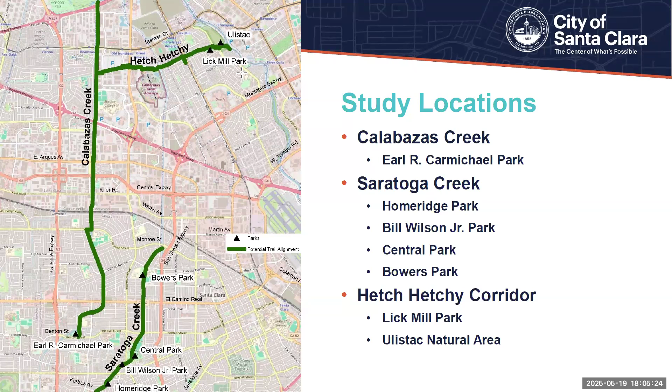If these trails were to develop, similar to the San Tomas Aquino Creek Trail, you would have a variety of off-street routes throughout the city connecting to many important visitor centers, to businesses and colleges, as well as to other local trails that are built, including the Guadalupe River Trail and the San Francisco Bay Trail.

This study builds upon work that the city undertook about 10 years ago, which was to first study the feasibility of these corridors. This work builds on that, and it expands to try and look at actual design, conceptual design of how a trail would be routed along these lands.

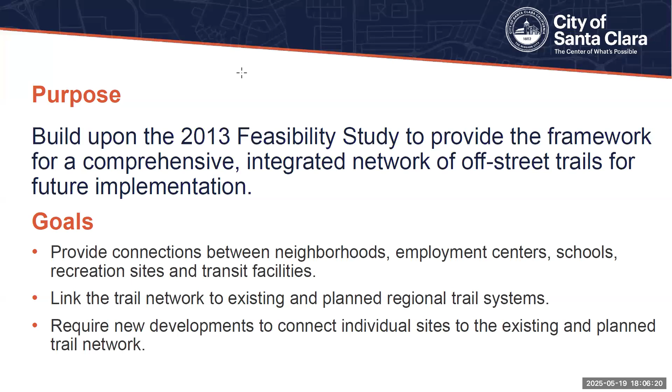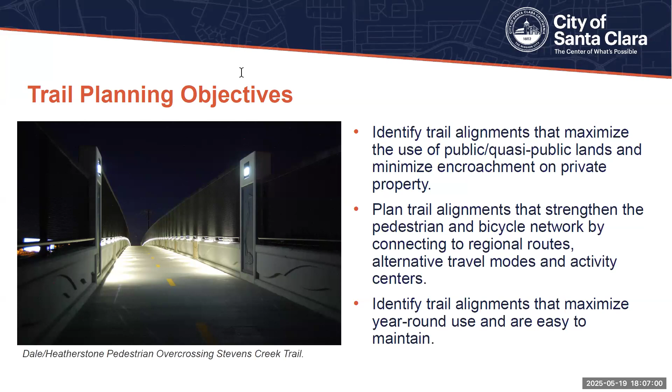It also does a lot to outreach to stakeholders who may own or control the land. Not much of the land that we're talking about is owned by the city of Santa Clara. Much of it is owned by San Francisco Public Utilities, by Valley Water, by other jurisdictions, even some private owners, Caltrain, Union Pacific Railroad that conveys the Capitol Corridor line as it comes into the Stars and Stripes area. So it's really a process of working with your partners to be able to facilitate development, again, not unlike the San Tomas Aquino Creek Trail that the city successfully built a number of years ago.

We want the trail system to honor the creeks. We want the trail system to link with the on-street system so it expands and builds upon that. And we really want to engage the community in thinking about what's possible. These are the different studies that have been undertaken or are in process. We are at the beginning of the public outreach phase.

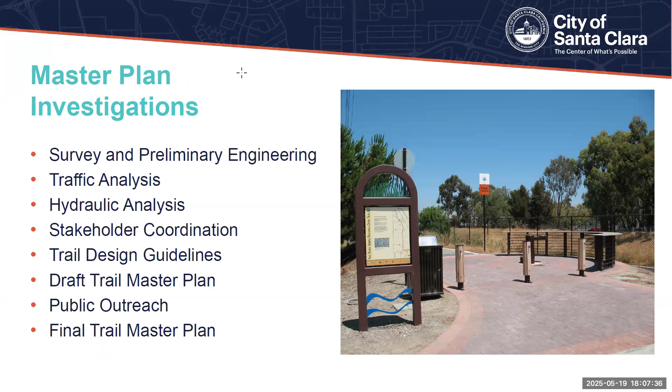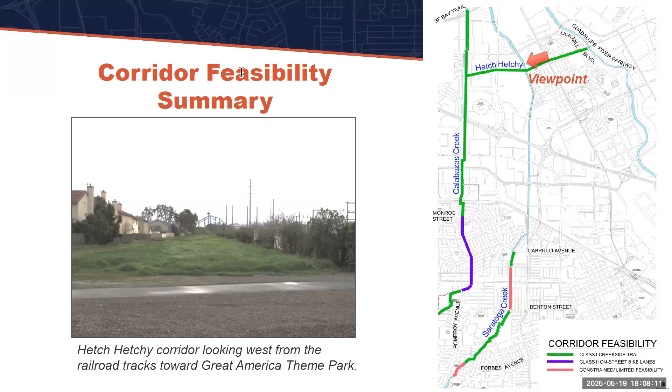This is just a very general map of the corridor feasibility as figured out in 2013. Anything you see in green has the potential to have a trail. Anything in purple really requires an on-street alignment, a bypass. And anything in pink means there's really no opportunity anywhere in the corridor or on the roads to create a trail. Very limited land, and I'll talk a little bit about that with each corridor.

One of the first things we do when developing trails is look at how much land is available, who owns it, who has easements on it, and what kind of habitat conditions exist. Nowadays we're also looking at climate change and how that will impact portions of the trail all around the bay.

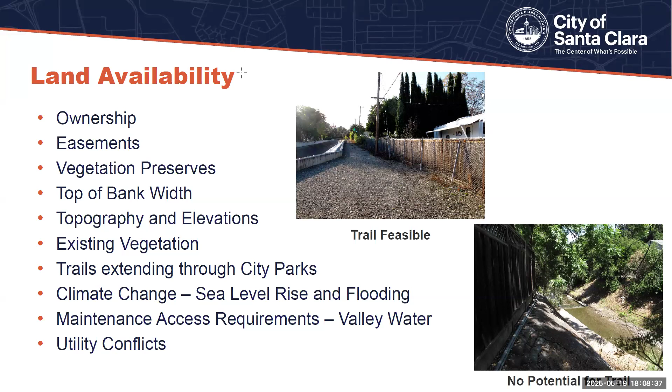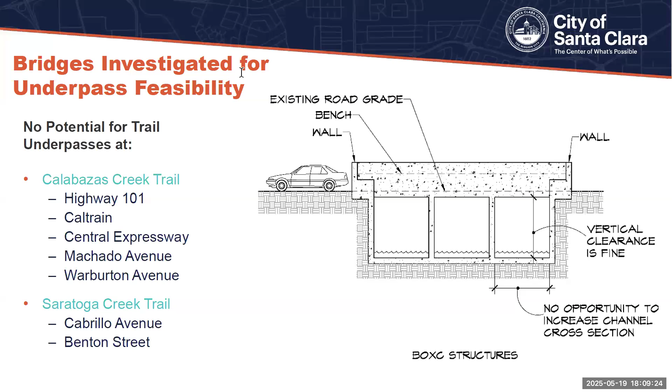We looked at bridges on the two creeks where we have bridges spanning the waterways. When we had bridges with no ability to open up, oftentimes those areas were inaccessible for creating an underpass under the trail. As you can see from this slide, that's a box culvert - there's no ability to lay back walls to create an underpass. The streets listed were not possible for a trail underpass, meaning either you're doing a tunnel adjacent to the creek or a pedestrian overpass to create a grade separated system.

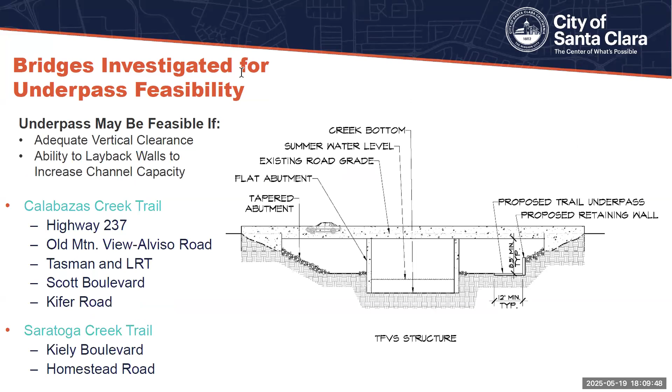Here is an opportunity where you can lay back the creek bank underneath the bridge. As long as you've got enough vertical clearance to meet Caltrans bike clearances, you potentially can build a successful trail underpass. Those are some of the sites where you potentially can build, as long as you can continue to also pass flood flows.

Trail construction takes time. As you know, in Santa Clara it took a decade or more, maybe even close to 15 years, to build the San Tomas Aquino Creek Trail. It was built in reaches or phases, and those phases had logical ending and beginning points that would connect into the on-street system, but it takes some time. It takes time because you're working with partners, permitting agencies, resource agencies, and having to raise the funds to do it.

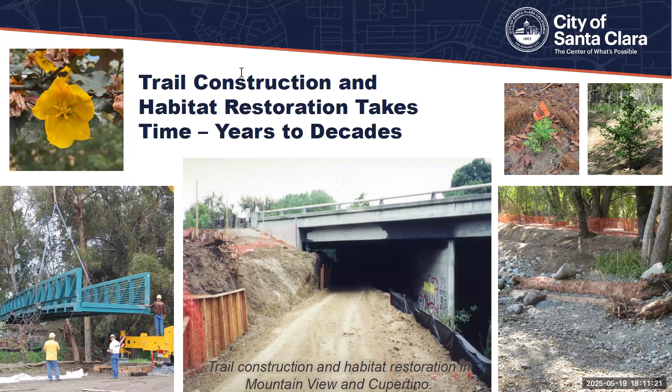So now I'm going to take you through each one of the corridors and just give you a sense of what's out there and what the preliminary concepts are for each.

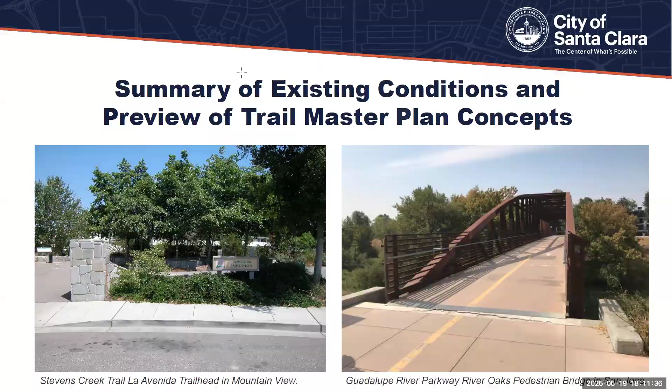Let's start with Calabazas. Calabazas begins upstream around Prune Ridge and extends all the way down to the Bay Trail underneath Highway 237. On this map, areas in red indicate we didn't have enough land availability for a pathway, and if you see a bright red dot, those were some of the underpasses I mentioned earlier where we couldn't put a trail underpass beneath that bridge.

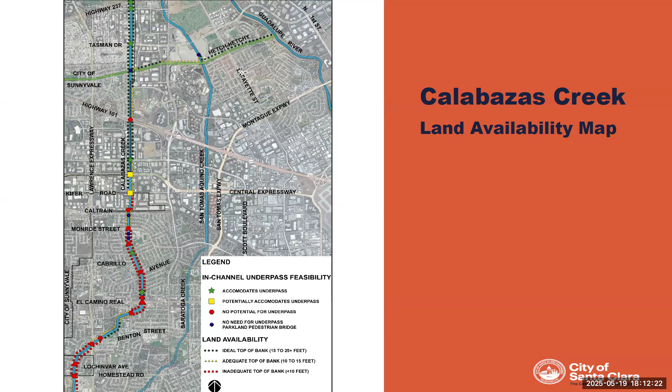You can see, in general, a lot more of the blues and greens from El Camino down to the bay, and quite a bit of red as we're moving more inland. Part of that is associated with the city's historic land use development, where much of the areas south of 101 were residential, and things were built very close to the creek. Things built later gave more space to the creek and levee setbacks. So it's a lot to do with how we built as a society over the past 50 years.

Calabazas Creek has 5 potential underpasses. One of those was recently built through a joint project between the city of Sunnyvale and Santa Clara, at Old Mountain View Alviso Road - you can see the construction photos there. That was set to allow bicycle and pedestrian passage underneath the bridge. We'd still have to formalize the ramps and get permitted for that purpose, but it gives you a sense of how long-term planning plays into all the projects you think to do.

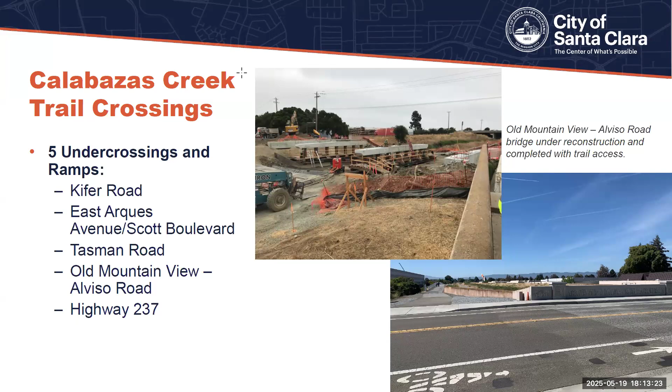There are 3 pedestrian overcrossings that would need to occur in order to remain a grade separated trail. The first one is really at Highway 101, working from upstream to downstream. No potential to go under 101, unlike what you have at San Tomas Aquino. The next would be at Central Expressway. And the final one, and the most complicated one, would be at Caltrain, which is now electrified. And it's just very limited

land in that area. There are also 6 at-grade crossings. Many of those are already in play with the on-street bike improvements that have been made along Calabazas Boulevard, and we would continue to use those. A couple that are the furthest upstream, there's really no land to even warrant an underpass because we just don't have top of bank on either side.

So challenges, 3 overcrossings is a big price tag. Sea level rise has the potential to impact the downstream reaches. You know, as sea level is rising, we're getting more inundation in the lower trail underpasses all the way around the bay. So their serviceability is becoming a bit more questionable in time. And we think about that.

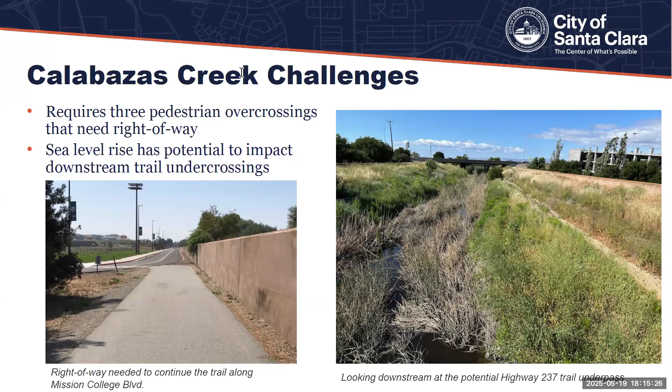I will say there's one thing not mentioned on this slide, and that is that Valley Water is also thinking of changing the configuration of the downstream ends of San Tomas Aquino and Calabazas with a habitat restoration project that integrates with Pond A8 in that area. And we're thinking about that as well when we talk about Calabazas. Another opportunity and or challenge.

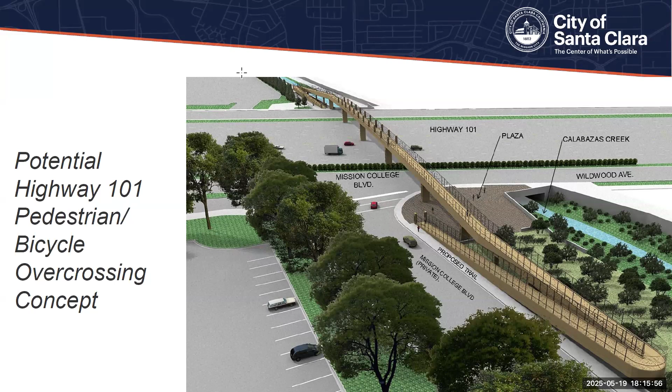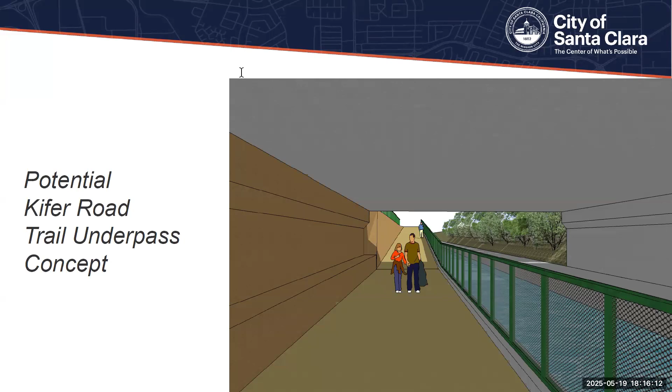Opportunities: grade separated trails, I believe, encourage more cycling, especially from novice and beginner cyclists. And that's one of the strongest points for them. Much of Calabazas uses existing elevated levee similar to San Tomas Aquino, and there are fewer issues with building in an area that's already been highly disturbed.

Let's see, the photo on the left is looking downstream. You can see Old Mountain View Alviso Bridge in the background. And then the photo on the right is where Hetch Hetchy comes across Calabazas. And Hetch Hetchy is built on the Sunnyvale side. And it's just a nice view. And even though there's this lovely pathway down in the floodplain that you see there, that is Valley Water's maintenance access road, and it routinely floods in the winter. So it's not a place for a trail. We would be behind the flood wall up higher.

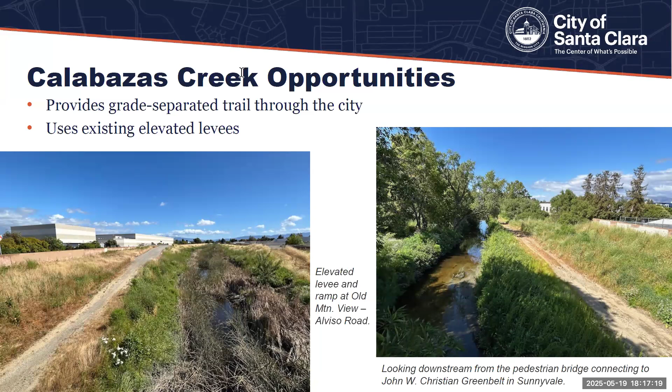When you move upstream of El Camino to Pomeroy, it has a different channel and street width. So we worked with both of those and ran these through hydraulic modeling to see that they would be feasible. And indeed, it looks like it would be, but again, it would be a significant partnership between the city and Valley Water to achieve this.

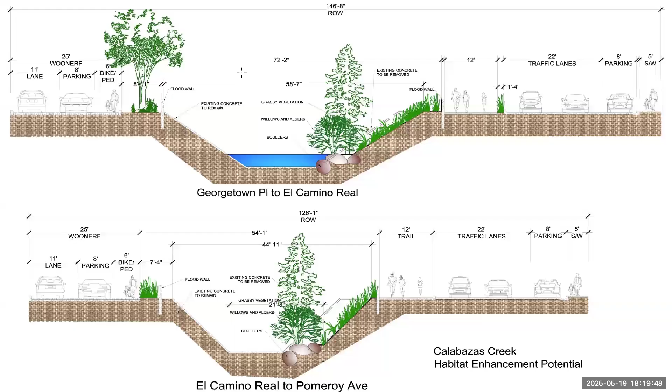Wherever we cross a road, we're generally at grade, but you can't cross a railroad track at grade. So the one pedestrian overcrossing that's here would be the most complicated of all 4 that we've studied. This would be at the Union Pacific, possibly future high-speed rail, long range, yeah, maybe, and Lafayette Street.

And then there would be one additional bike ped bridge spanning San Tomas Aquino Creek, because you would extend from Calabazas through the Hetch Hetchy right-of-way or private property on either side of the right-of-way to San Tomas, to the connection there, and then all the way through Ulistac to the Guadalupe River Parkway. These are the at-grade crossings. They would require changes to signals, but feasible.

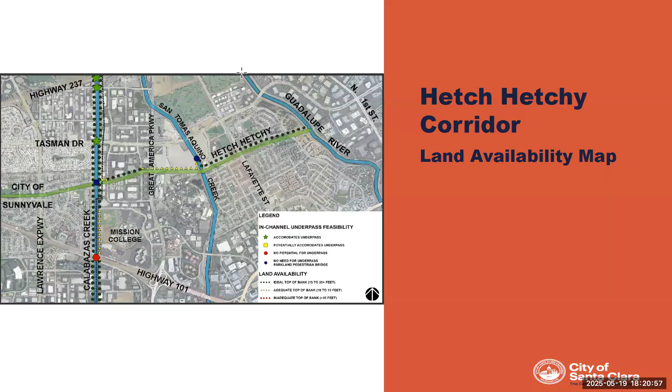And this is where the city has developed a small bike path. That's a reroute of the San Tomas Aquino. It's also a trail that gets you into the back of the station, the Capitol Corridor station. Just gives you a sense of what it's like. So we have limitations to what you can and can't do on a right of way. You also cannot plant trees on the Hetch Hetchy right of way. Even though there's some there now, you cannot get away with doing that these days.

We have a lot of issues with maybe passing Levi Stadium. You have a new opportunity in the sense that Great America Theme Park is going to close. And maybe finding passageway through that land through a development agreement is an ideal solution to be outside of the Levi Stadium security perimeter. Yes, thank you.

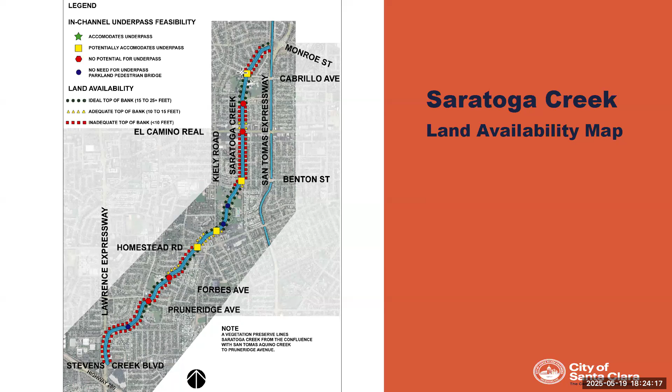Let me show you some photos. So there's potential undercrossings at Homestead and Kiely. Both of these would impact a significant number of trees and vegetation within the vegetation preserve of Saratoga Creek. There's potential for a bike bridge at the end of Stevenson, which is the backside of Homeridge Park. And we had planned that when the Baptist church that faces Forbes was under redevelopment, and we thought we would be able to negotiate a trail passageway there.

The challenges have brought us to some conclusions between staff and the consultant team that in these areas where we really have no top of bank, we had developed, and we'll show you this in the next series of meetings, some on-street alignments. We're not sure there's a high utility for those alignments when you already have San Tomas Expressway, which is an extension of the San Tomas Aquino Creek. You already have Calabazas Boulevard. To put something else in between those on smaller streets may or may not be useful. So we'll share it with the public, but we're seeing less potential there.